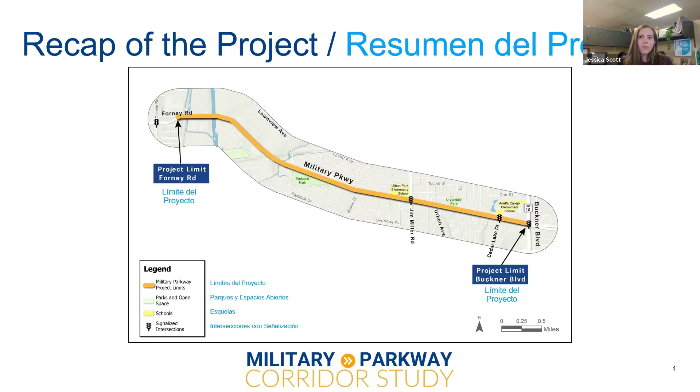So this is the corridor, as you all know if you've been involved in this project, looking for short-term and long-term implementation changes on the entire segment. We heard very early on a number of goals for this project, and we kept those as our guiding light throughout this process, whenever we reviewed previous comments and developed this final recommendation and phasing moving forward.

Goal number 1 in this project was to slow traffic, especially in business areas. This helps not only improve safety, but can improve the options and opportunity for people to slow down and actually stop and visit the businesses on the corridor.

Goal number 2 is to improve safety for all road users. This is not just the motorists on the corridor, but the pedestrians and bicyclists that we know are using the corridor today, and will continue to use it in the future.

Goal number 3 for this project was to add more trees and more greenery, making it a more comfortable commercial corridor, really inviting people to be on the corridor more than they are today.

Goal number 4 is to provide walking and biking connections to all the destinations, these incredible amenities we have in this part of the city, including the Trinity Forest Spine Trail, schools, and businesses, as we've mentioned. So with that, I'll turn it over to the project team to talk specifically about the alternatives we presented previously, and they can talk about the trade-offs and where we landed with the final recommendation.

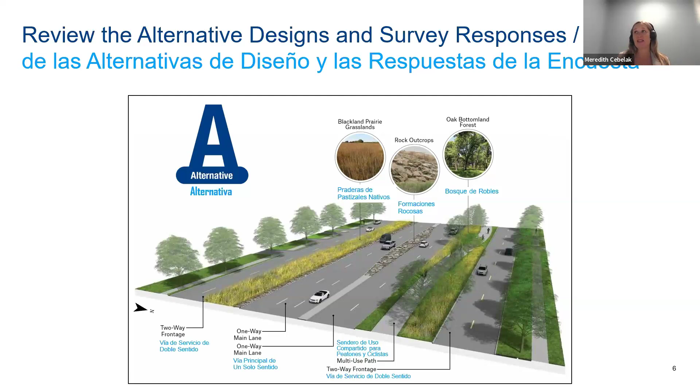Thanks, Jessica. As a reminder, in that previous meeting back in 2024-25, we had two different options: alternative A and alternative B. Alternative A, on screen now, includes some options for two-way frontage roads, opportunities for a multi-use path, and a lot of the greenery just discussed as one of the goals for the project. Looking at option B, a little different look - now we're using some one-way frontage roads.

We still have the bike path, or multi-use path, and we have a lot of greenery also throughout the area.

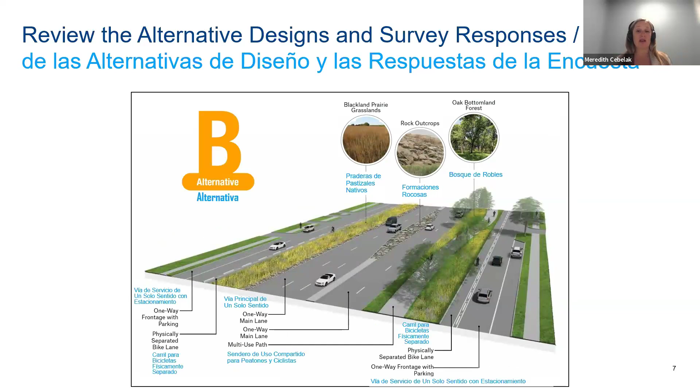In conducting our both in-person and online survey responses, we asked the community for your responses on which alternative made the most sense. Looking at the differences here in design, again the frontage roads - the two differences between alternative A and B is whether it's mostly a two-way corridor or facility, or a one-way facility. Locations in A also had typical four-leg intersections, whereas alternative B had some reductions due to one-way connectivity.

We looked at traffic flow and safety between these two to compare them. There are moderate improvements in alternative A to the intersections, whereas because we're going to one-way in alternative B, there were significant flow and safety improvements since you don't have those conflicting car interactions. Both alternatives had bike shared paths and bike lanes, but there were some enhancements in alternative B along the frontage roads for the corridor. Landscaping again for both, but alternative B did have some wider sidewalks and increased landscaping, while alternative A had some traffic calming features.

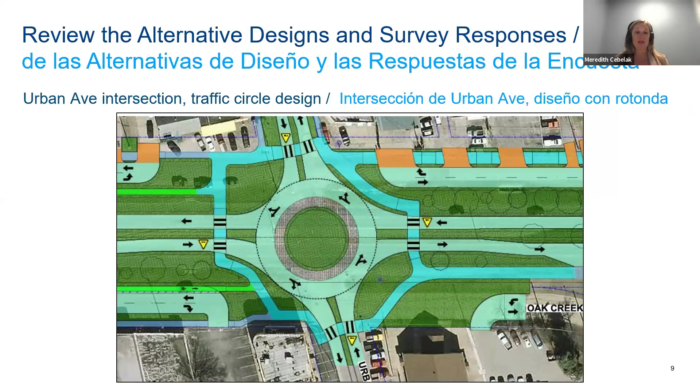The other option we also presented during that meeting was at Urban Avenue. At this intersection, we looked at two different opportunities: putting in a traffic circle roundabout, as you're seeing on the screen, or another opportunity of putting in a signalized intersection.

We took both of these to the public meeting as well as on the online survey and received insights on both opportunities, along with the frontage road combination of two and one-way facilities, looking at how we could reduce conflict points. With respect to traffic flow and safety, we heard that the roundabout improves traffic flow rather than having a signalized stop-controlled location, allowing people to easily move through the corridor. There are still bike and pedestrian facilities in both options, so we're not compromising our mobility options in the corridor.

We received a lot of divided opinion between the roundabout and the signal. In the long run, that'll factor into some of the decisions we made for the overall corridor. It was kind of a 50-50 split—many people enjoyed the roundabout, many people wanted the signal.

Some response themes with respect to the frontage roads: the preference was between one-way versus two-way. The majority of people, 57%, actually responded that they preferred the one-way operation along the frontage road.

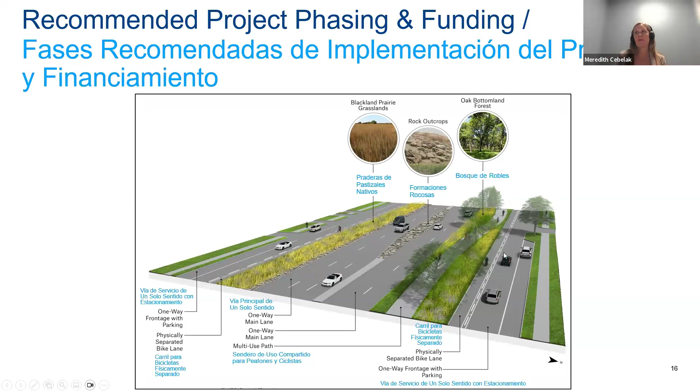Okay, so going into funding, we've broken it into three different buckets. Phase one is more near term, things we can do fairly quickly on the corridor. Phase two will take a little longer, and phase three is a lot further out. We'll go through why those situations are as they are as we move through this.

So in phase one, the game plan is to do frontage road reconstruction, converting them from two-way to one-way, done through signage and striping. That's something that can be done fairly quickly with minimal resistance or challenges for the public. We'll also be doing enhancements for pedestrian crossings, since one of the goals was a safe corridor for all users, and we want to identify that early in the project. There will be a couple of median closures to help with the frontage road conversion, which will help traffic flow and keep everybody moving appropriately. We'll also do some select corridor landscaping in this phase, starting the greenification of the corridor.

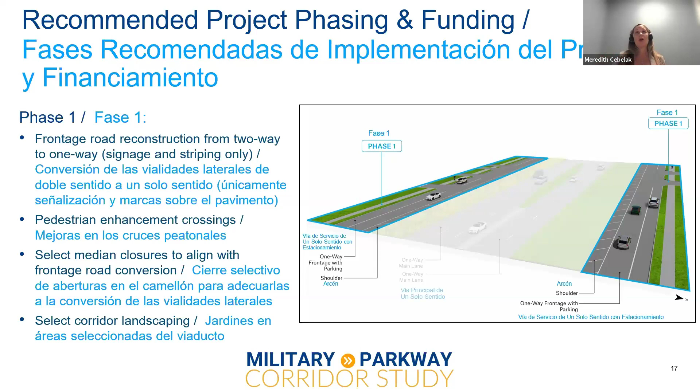The part of the corridor this will impact is the middle section, from Lawnview to Cedar Lake Drive. So a good portion of the project would experience these early changes in phase 1, impacting both Urban Park School and Parkdale Park, as well as parts of the more business-oriented area of the corridor.

For phase 2, we're still focusing on our outer areas, the frontage roads. This is where we'll reconstruct to install bike and pedestrian facilities, again from Lawnview to Cedar Lake Drive. You can see how those are now represented in the corridor. At Urban Avenue, this is where the signal will come in. Because this is phase 2, there's an opportunity to look at a roundabout option, but at least we could do a signal fairly quickly to help with traffic flow there. Additionally, we'll do illumination improvements, helping the lighting along the corridor for a nice feel and safety, with good lit areas where pedestrians, bicyclists, and vehicles interact.

Additional landscaping will be done in this phase. We've had some in the beginning, and we're adding more, particularly more grasslands and trees along the corridor to help with heat, provide shade, and make it a welcoming place where the community and businesses benefit from the greenery. This again will happen between Lawnview and Cedar Lake Drive, focusing on that middle section of the project to really enhance what's happening in that space.

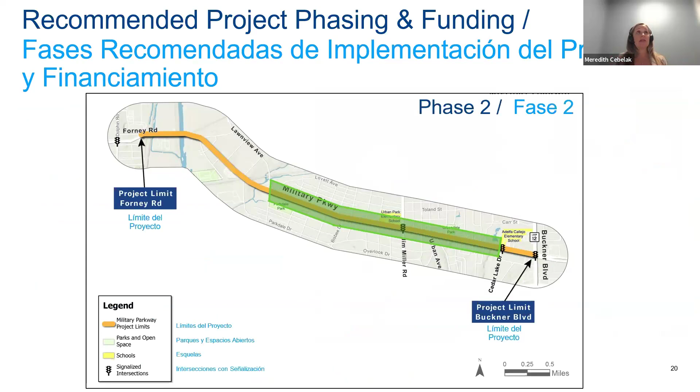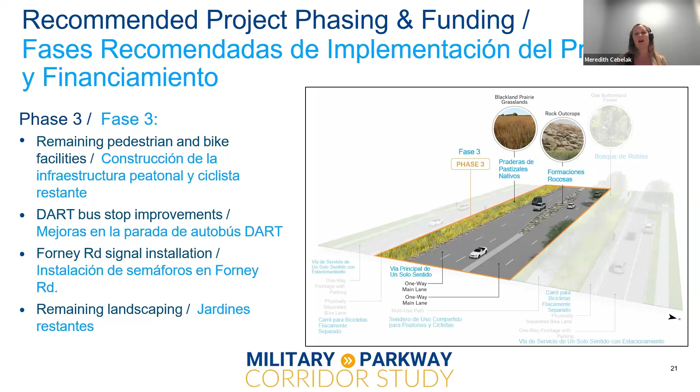Phase 3 is further out. This is where we'll put in the remaining bike and pedestrian facilities, improve the bus stops for DART, upgrade the signalized intersection at Forney, and complete all remaining landscaping. The majority of why this is so far out is the reconstruction of the main line, giving it a very different feel than today, helping curb some of the speeding, and making it the final piece of an enjoyed facility running through the community. This will take place across the entirety of the corridor, so all parts of the community along Military Parkway, all the businesses, will see vast improvements in that final phase.

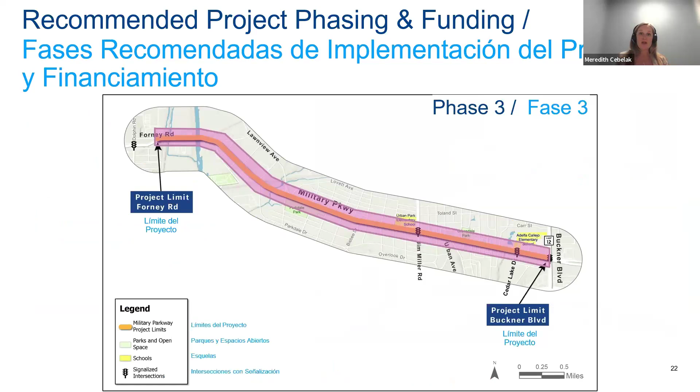So next steps for the project: we're going to work to confirm and advance phase 1 as we've discussed today. That way we can get some immediate safety and operational benefits and establish early viability of the project. This isn't a project where you have to wait years to see anything happen. These are some things we can do in the nearer term.

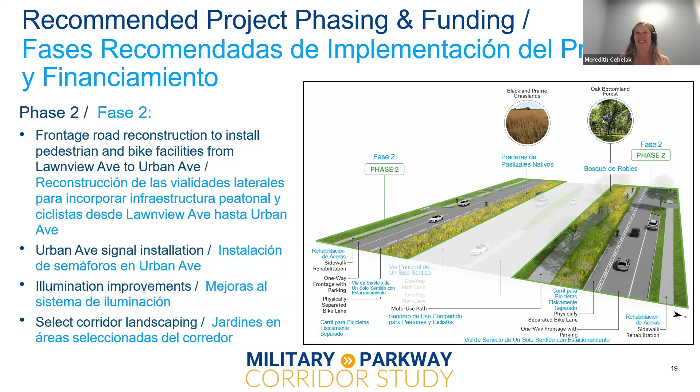Should I repeat the question? Will the White Rock Creek Bridge be marked for two lanes of traffic in each direction with a shared use path on the remaining deck? Is that part of the plan linked to the loop crossing? I don't know, maybe Matthew knows the answer to that one. It seems like it's a question about the bridge design.

I'm not finding it in front of me, and I'll say this is not detailed design yet. So, regarding the earlier question about concrete barriers between the travel lane and the shared use path, the answer is no, that's not proposed. We're leaning on horizontal separation, with a grassed median between the travel lane and the shared use path. With that, we're more comfortable not having a pedestrian barrier, since there's physical distance between the travel lane and the path. We're also hoping that other striping changes on the corridor will help slow traffic, so we won't see the high speeds we're experiencing today. With anticipated slower car speeds and the distance between the path and the road, people would feel more comfortable on that trail. As for that bridge question, I'd have to take another look, or it will be defined once this is in final design.